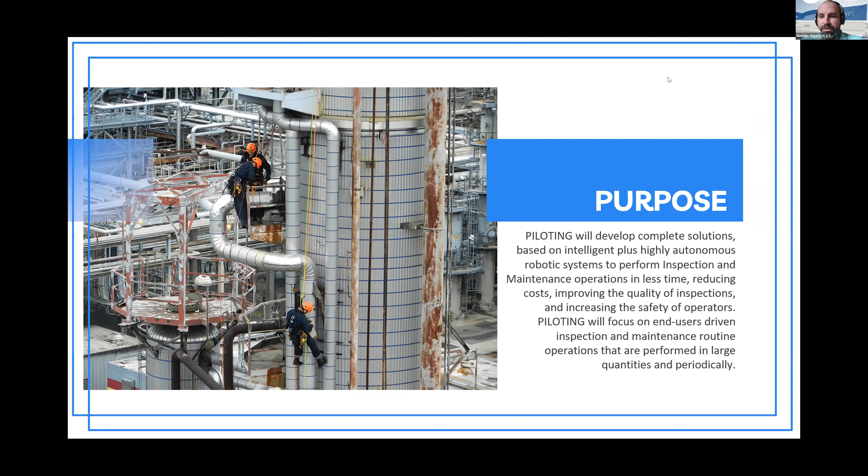So what are the main challenges and objectives? The main three challenges are: of course, as with any inspection, we need to reduce inspection costs and also the downtime - the time we cannot use the infrastructure. This is very important, so you can complete the inspection while minimally disturbing the regular operation of the infrastructure.

The second challenge is to produce reliable and high quality inspection data. And the third is to increase the safety of personnel, because many of these operations take place at height or in other dangerous scenarios and environments.

So in order to cover these challenges, we have five main objectives in the project. First of all, we are working to increase the technology readiness level of the robotics and artificial intelligence technology up to TRL 7 in this project, across different types of robotic solutions - aerial, ground, and crawlers. Also, we are developing what we call the piloting inspection maintenance platform, a set of software that facilitates the use of robots in inspections and also facilitates the handling of all the data required, from planning to analysis of the inspection data, in a fully digitalized way and fully integrated with the robotic system.

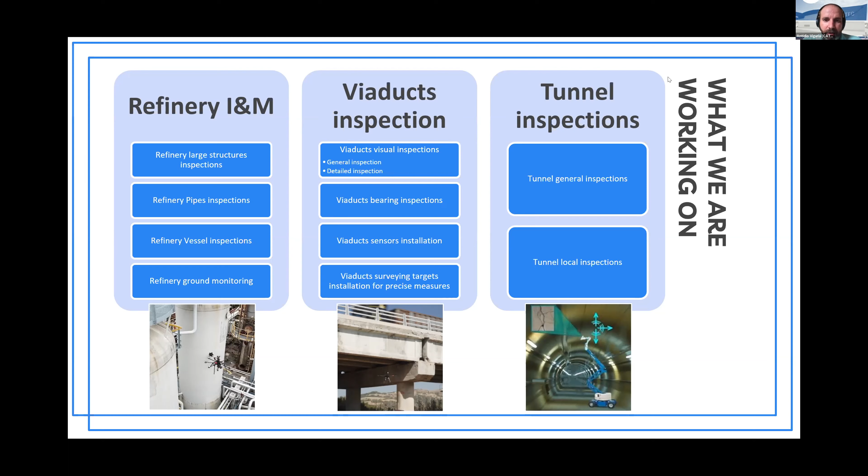And finally, for the tunnel inspection, we have the general inspections that will make use of UGV, and the local inspection that is a mix between the UGV and an aerial robot. So for all these 10 use cases that we are covering in piloting, which is a high diversity, we are going to use and adapt a number of robots.

We have a number of aerial robots, ground robots, crawlers, and hybrid robots that you can see here. It's important to highlight that for all of these robots, we are targeting a high level of autonomy, so it makes it easier to operate and also facilitates their interaction and decreases the training needed for the operator.

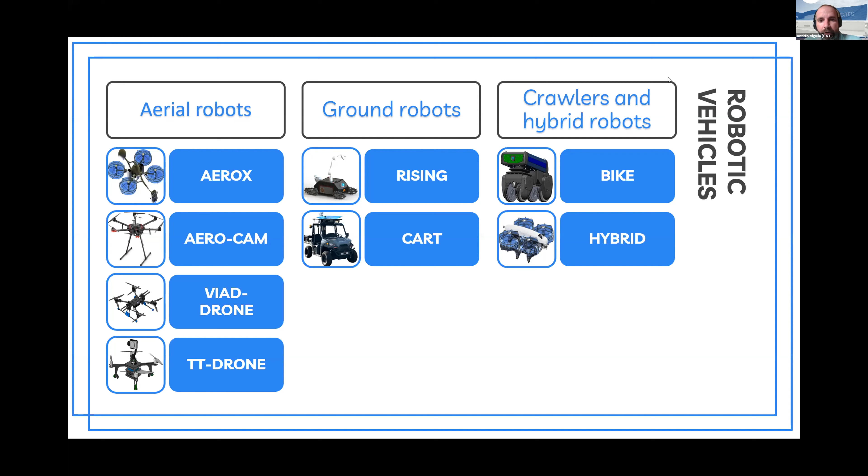And for all these robots, we are integrating what we call the piloting inspection maintenance platform. As I said before, it has a visualization portal, and then it's a set of software that facilitates the planning of the inspection missions, the planning of the specific data, the monitoring of the execution of the mission by the robots, and also the analysis of the data. So it's a set of software that complements the robot and integrates it in a common framework, so you can easily integrate future use cases and future robotic systems.

Since we are covering a large number of use cases and a large number of robots, we hope this will be a key element to boost the use of robotics in inspection and maintenance in the future. Actually, we plan to open source this platform by the end of the project. So if you are interested in that, you can contact us.

And yeah, I think with that I will just leave the floor for the first presentation, and I hope you can take control of the presentation so that you can move forward with the slides. Otherwise, you just have to ask me to do it. Can you see or not the presentation? Can you comment on your value proposition?

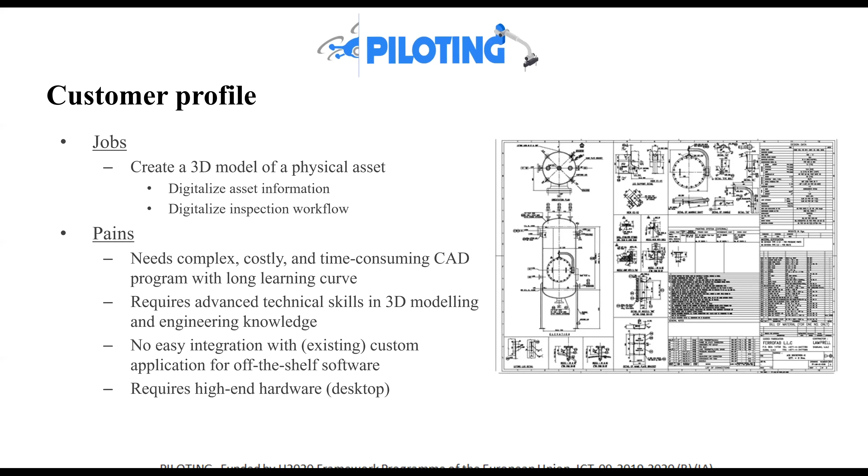Welcome to the presentation of the mission planning interface. Can you just go one slide forward, please? Yes.

Basically, what you see on the right is the kind of information you usually have when planning jobs in refineries and other infrastructure for inspection. It's basically a drawing with some hand-added or computer-added information on where to inspect what, and some basic planning. It's pretty difficult, and of course it varies from asset type to asset type, and it's a lot of work to do this kind of preparation.

And the other thing is, when you later want to follow through with the inspection, it's quite tedious to figure out from the drawings where you really need to do the inspection based on the planning.

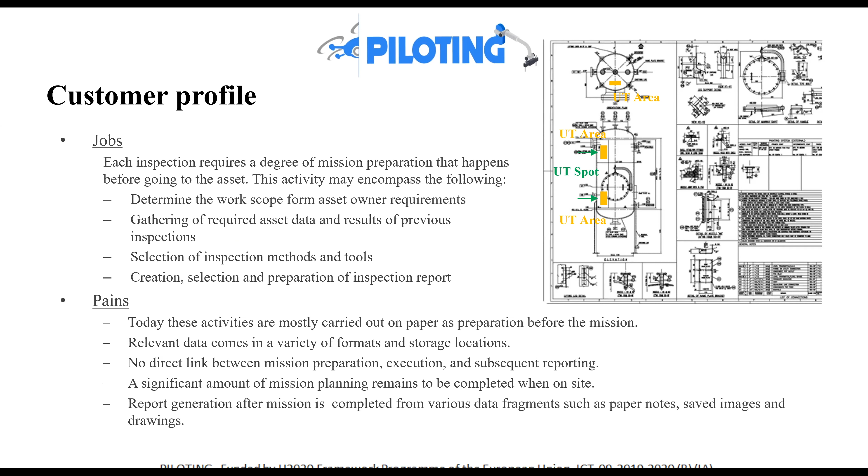So can you go one slide forward, please? Thank you.

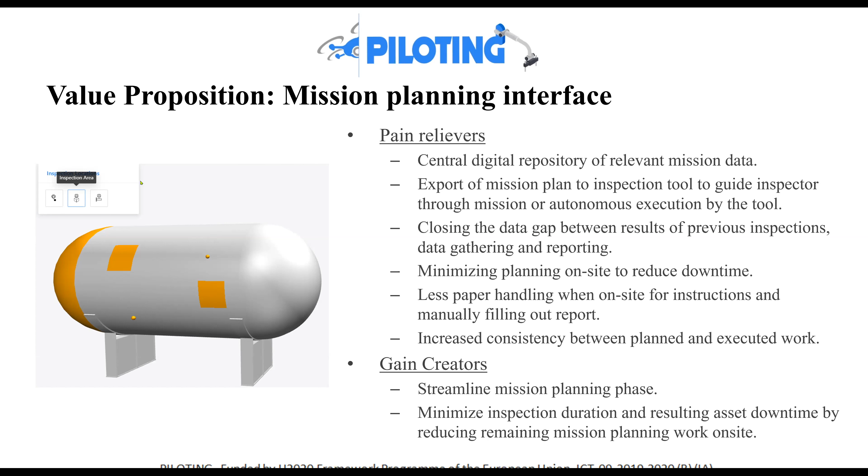Let's say this is a pressure vessel, and on that pressure vessel there are certain areas that need to be inspected in certain ways. For instance, there could be spot locations where a thickness reading should be performed. And of course, it would make sense that every time this asset is inspected, the thickness reading should be taken in the same area. Otherwise comparison over time is very, very difficult.

So you see here on the left how these things can be improved if you have a 3D representation where the location is very precisely stored. Now I will go through the slide a little bit. I already mentioned the central repository that helps access to asset information, as well as to inspection results created in earlier inspections, and also to mission data.

The big benefit of the piloting approach in this is that once an inspection is planned in this type of 3D tool, it can be exported directly to the inspection tool. And the inspection tool can either autonomously already perform parts of these inspections, or it can guide the inspector through the process so that basically the entire mission is executed as planned, guided by the tool or even executed directly by the tool. It depends, of course, on the tool and its capabilities, but many of those tools that are used in the piloting project are able to autonomously move around and follow these inspection plans.

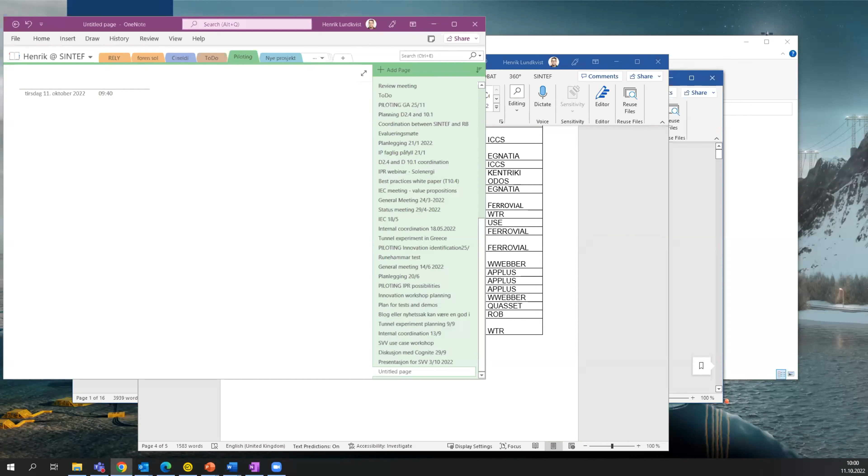Okay, this is the link that is in the chat. And I'm not sure if everyone received the link. Yes. So if you can just share the screen with the link. Do you see the right screen? No, the one with the OneNote, that's the wrong screen. Let me check one second. Okay. Now you get the correct screen? No. Stop share. Okay. I can share the screen. Let's see. Yeah, now we can see it. Not full screen, but we can see it.

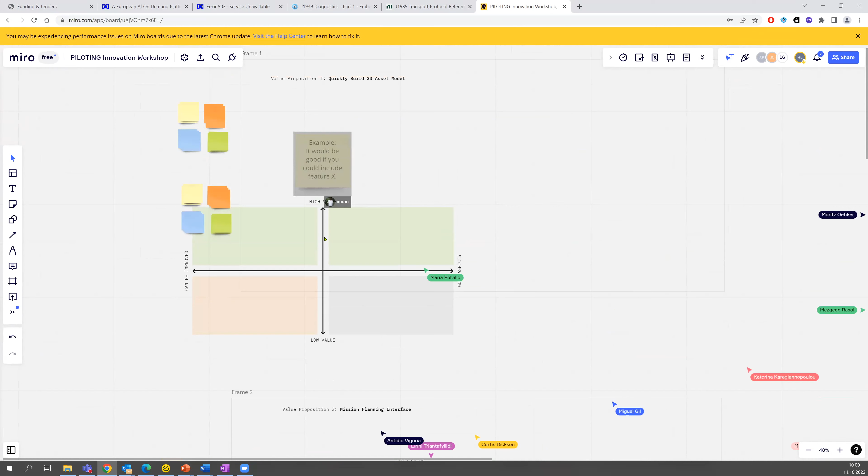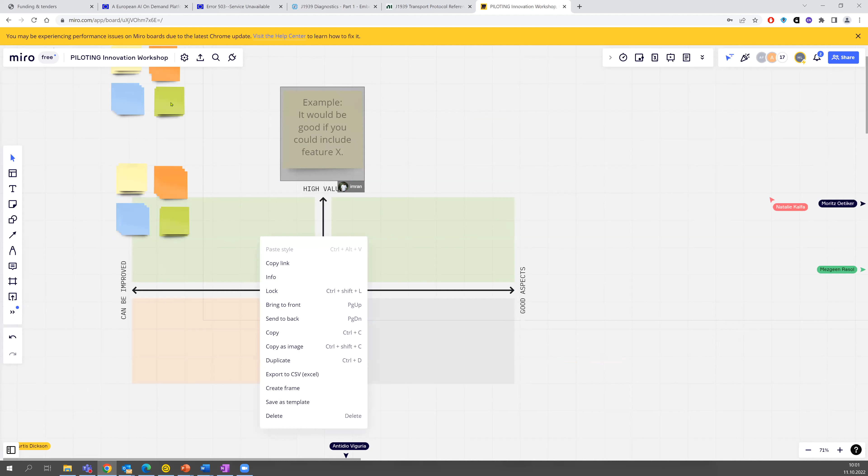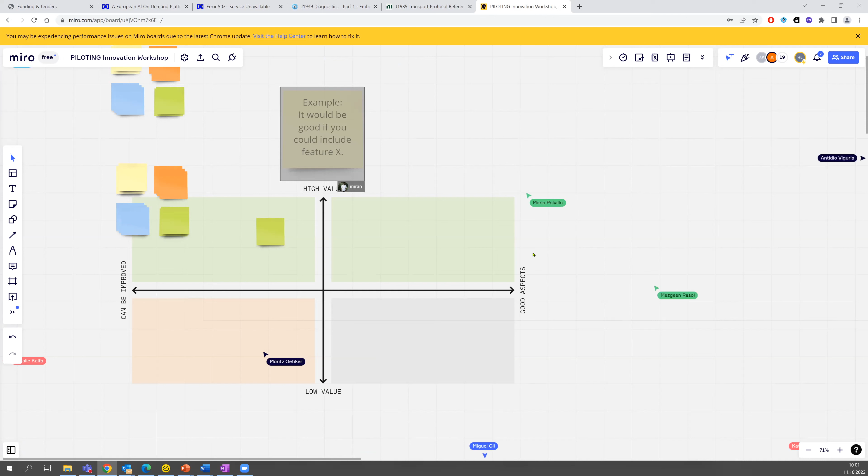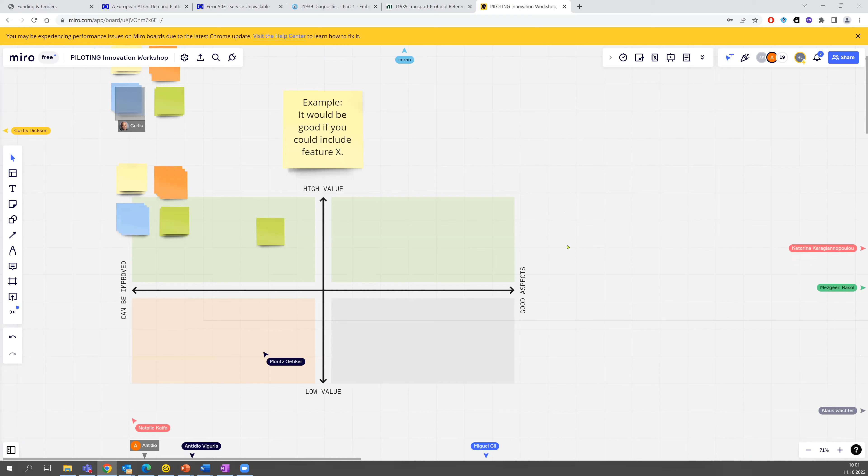Okay, then I can just take it into full screen, and here you can see the different value propositions. It's zooming a bit strange. I think it's struggling a bit with too many users maybe, but the idea is basically that you can either just leave a comment, or you can grab one of these post-its and start typing your comments. And here we use this axis for whether it's something you need to improve or something that you think is good, and on the other axis, if you see it as low value or high value. And if you don't see exactly where to put it, you could also put it just a bit outside of this. That would also be fine.

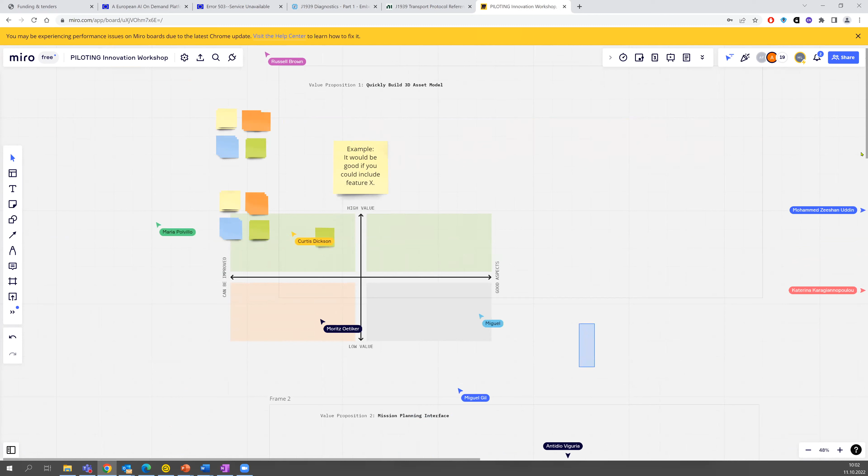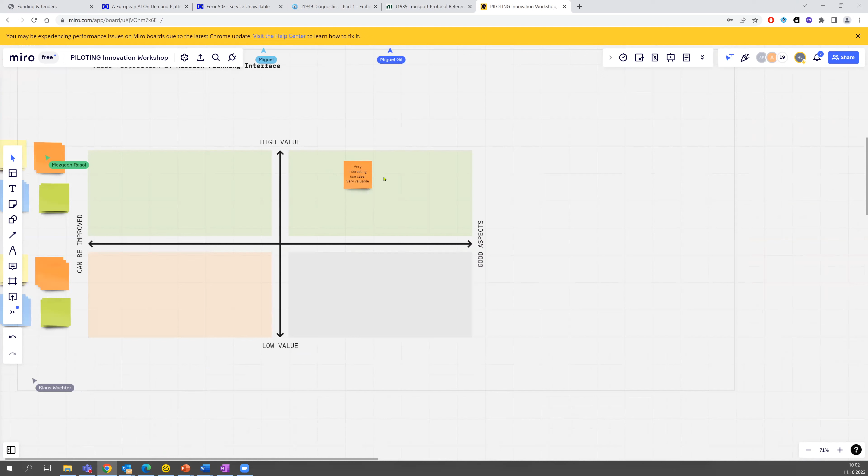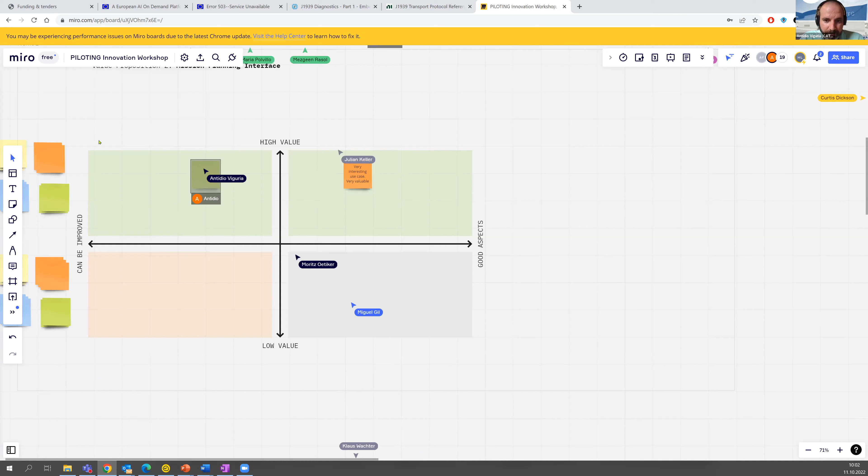But you see we have this frame, so for value proposition 1, the quickly build 3D asset model, I just put this example, and now we should actually be at number 2, which is this mission planning interface that was presented. It's a bit slow, at least for me, but I hope it's working better for you. So here you see someone has put in a comment. It's as easy as that: we can put here a note and then write something like, for example, high value, but can be improved, extend to vehicles such as something like that.

Okay. So please, everybody, have a look at it, so you can put some comments while we are presenting the different value propositions. So I think, Henrik, we can go to the next one.

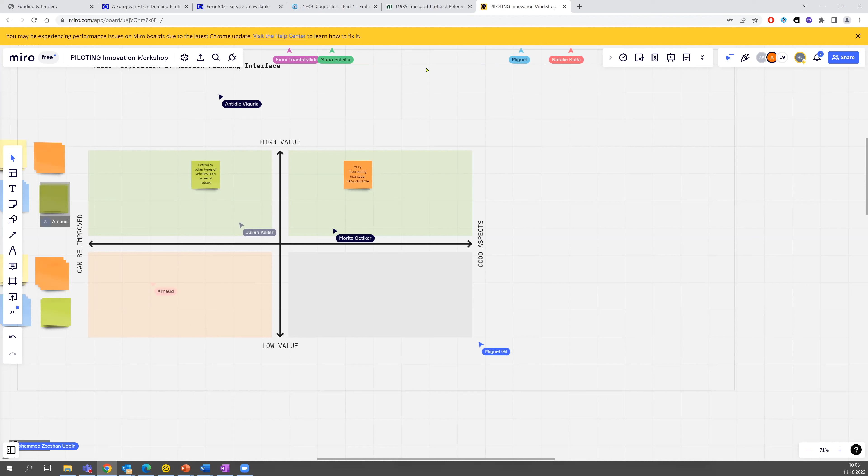Arnaud, is your mic not working? Can you hear me now? Yeah, now we hear you. So I can go back to the first presentation.

Yeah. You can speed it a little bit. Perfect. Yeah, okay, I'll try.

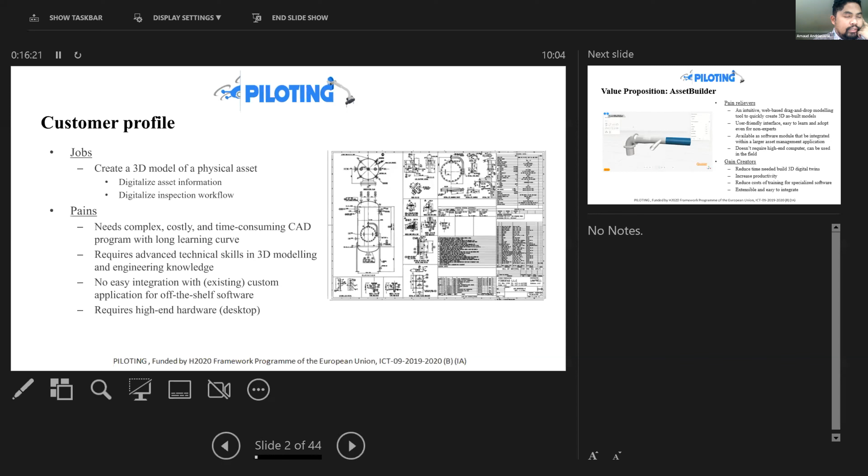Good morning, everyone. My name is Arnaud. I'm from Quasset, and we are doing the intelligence and visualization portal in the context of piloting. This value proposition is about quickly building a 3D asset model, and it's not in full screen anymore, the slides, but so why do we want to do that? So the customer profile that we're targeting here is that the job is to build a 3D model of physical assets. And we see a lot that there is an acceleration of the use of robotic solutions for inspection and maintenance, and also in terms of digitalization of the asset integrity management. And the 3D model is a central piece in that workflow.

And the main problem is that, first, for aging assets, digital twins typically do not exist, and at best you have just the drawing of the as-built assets. So that's what you see on the right there. And if you have such drawings, you need to understand what it is first, but also building it with a traditional CAD program is complex, costly, and time-consuming. And you also need to have a lot of technical skills in terms of 3D modeling and engineering knowledge. And such an application, such as Maya, for example, cannot be easily integrated with existing custom applications, and they also typically require high-end desktop hardware.

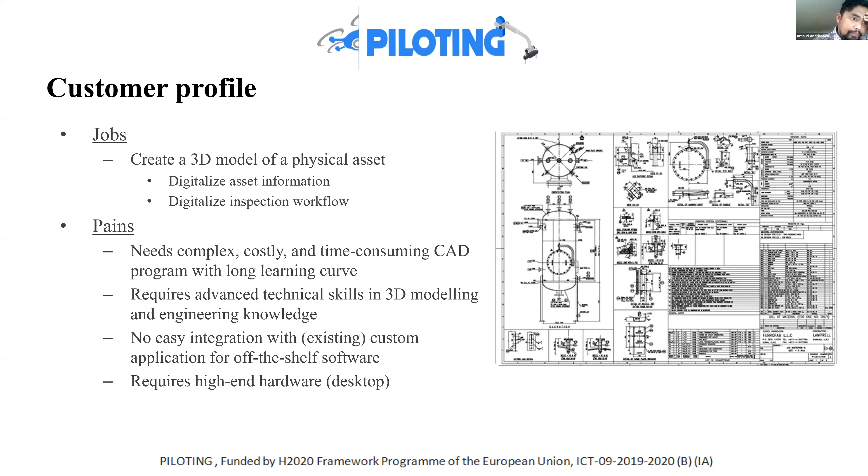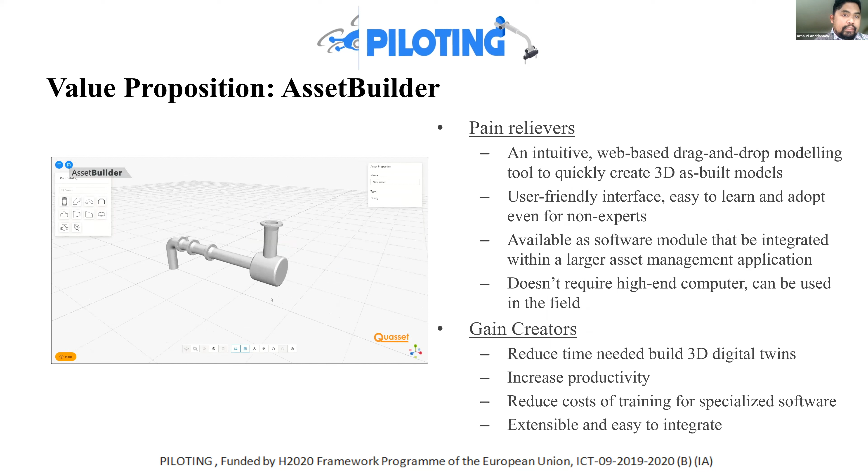So how do we solve that? If you can go to the next slide. Yeah, so what we have here is the product that we already have developed and started to sell. It's called AssetBuilder, and it is essentially a web-based drag and drop modeling tool that allows you to quickly build a certain type of assets. And the way it works is that we put a lot of domain knowledge into the software, so that it makes it very user-friendly and also easy to learn and adopt, even for non-technical experts. And it's essentially just like building an asset from Lego. The Lego here are the parts, and these parts depend on the specific type of assets.

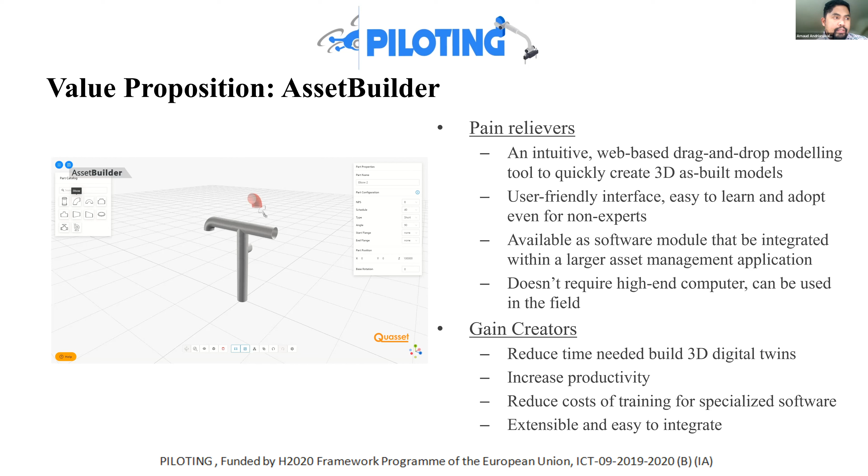And the real gain that you're going to get out of this is that you can build a digital twin of large assets from scratch within minutes. And that results in sensibly increasing the productivity, but also it would reduce the cost of training for specialized software. In addition, we have this product either as a standalone software as a service, or it can also be integrated into existing custom applications. If you go to the next slide. Okay.

As I said, building those models is basically like assembling Legos, and those Legos are parts which are specific to assets. And what we do is that you need to know exactly how those parts connect to each other. And if you change some parameters, basically the whole asset will update. And for that, you need to know exactly what kind of assets we are building. And at the moment, we are supporting 3 classes of assets: pressure vessels, so that's the one that you see in the previous slides from Moritz. We can build piping assets as well, and we can build storage tank assets.

Those models are going to be used to share dimension and geometry of the assets. So that's in the whole line of digitalizing your assets. In the context of piloting, as you saw from the previous slides, we are using those models also to indicate the inspection locations where a robot had to go to. It also serves as a reference for some of the robotic navigations. And we can also use these models to display the inspection results in context of the 3D assets. And yeah, I think that's in short about this value proposition.

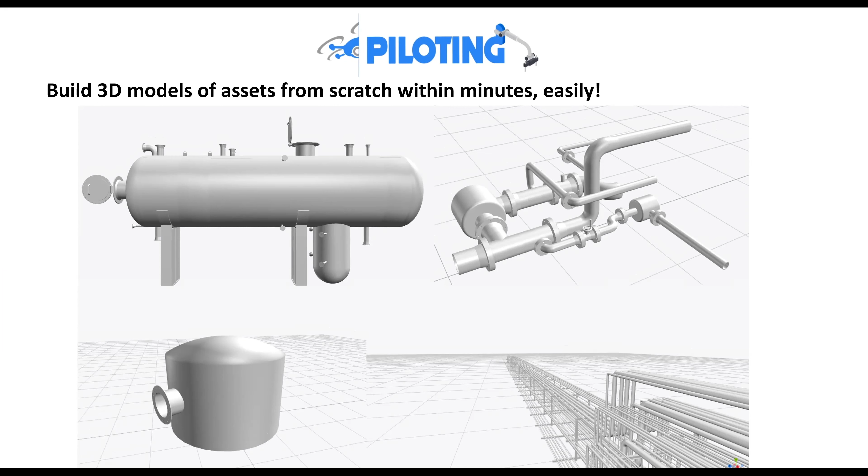Thank you very much. Yeah. I can see that there are some people putting some notes on the Miro. For example, there's one person that put that it could be interesting to integrate with BIM models. Thank you very much. So please, if you see something that can be improved, something that is low value or high value, please use the stickies on the Miro so you can send us your comments, so we transmit your comments in an easy way. Thank you.

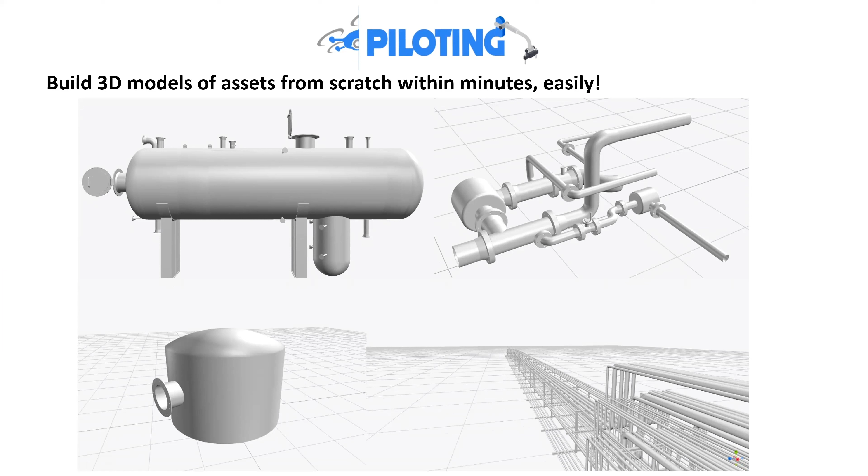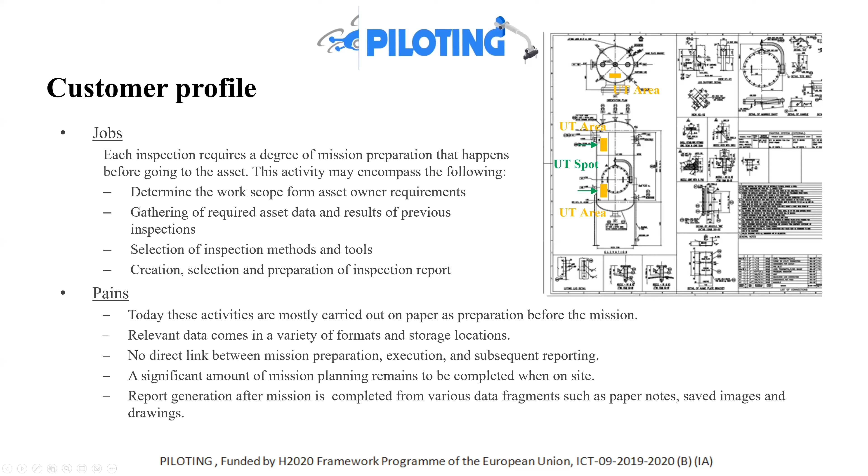So we can go to the next one, Henrik. Yes, so I think it's Christos maybe. Mission planning interface. Oh no, it was already. Yeah, the PILOTING I&M platform.

So hello everyone, I'm Christos, and this value proposition discusses the piloting inspection and maintenance platform. So next slide, please.

The inspection at various infrastructures such as refineries, bridges or tunnels includes mainly three tasks. First of all, the organization of a planning in order to perform an inspection at the respective infrastructure. Second, the collection of different data sources, which may have to be digitalized or even transformed into an appropriate format in order to be stored and evaluated. And finally, the storage of this collected data and the evaluation of them.

During the inspection process, the companies have to collect all the inspection data and also deal with the heterogeneity of them due to different inspections and robotic systems. And also the absence of an automated process means extra effort for collection, harmonization and organization of this data. Therefore, the process of the inspections and the transformation of the data into available digitalized knowledge may be a costly and time-consuming process. And sometimes there may also be inconsistencies in the reports of the inspection results or errors in the results due to inspectors' subjective judgment.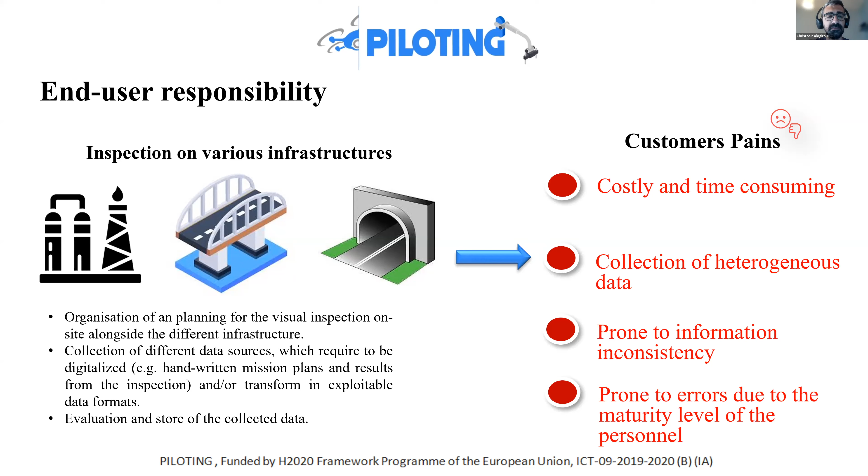So we here introduce the inspection and maintenance platform, which is a framework that can allow the pilot end users, as well as any engineering inspection companies, to perform complete inspection tasks in critical infrastructures. Moreover, this platform offers connection with a variety of robotic systems, and it also offers functions such as data harmonization and storing of this data.

So the platform consists of three components. The first one is the general robot control station. This component is responsible for establishing a connection with every robotic system and also commanding the actions of the robotic systems in order to perform the inspections at various infrastructures.

We have also the data management system, which provides authorized functionality to the users. The main responsibility of the DMS is to manage the data of the inspection. In other words, DMS is capable of retrieving, indexing, and storing any data received from robotics or static legacy systems during the inspection process. So the user can have easy access to this data.

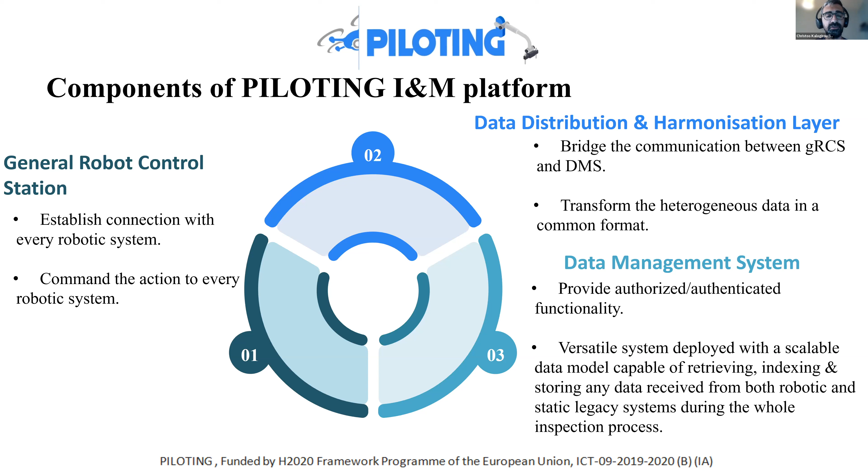So what this solution offers is that now the inspection data can be easily handled as they are digitalized automatically, and they can also be very easily accessed using, for example, the DMS. The inspection missions can be performed in a safe environment, allowing the remote navigation of various sensors, and the inspection data are accompanied by time and location indexing, allowing the localization and detection of any issues for the end user.

And finally, inspection data such as the data from robotic systems, the AI results, or the inspection documents will be given in a standard format, ensuring information coherency and the prevention of any data loss and misinterpretation of the collected data.

So the gain created from this platform is that it provides a solution that can incorporate and communicate with a variety of robotic systems, such as aerial, crawler, or ground robots, to process different kinds of inspections, so that data can be organized and collected for any industry scenarios, such as refineries, viaducts, and tunnels. The platform also offers a better representation of the inspection by monitoring this process and giving an improved, more accurate and safe understanding of the infrastructure.

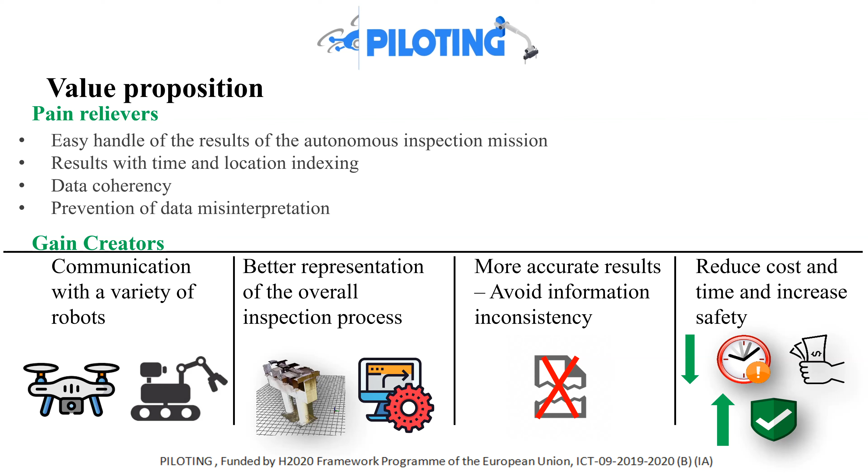Perfect. Yeah. So I think we can continue with the next one while people are putting some comments. We can leave maybe 1 minute. Henrik? Yeah. I think... Bye. Yeah, I will move forward to the next because I think I have it in the wrong order. So. Good.

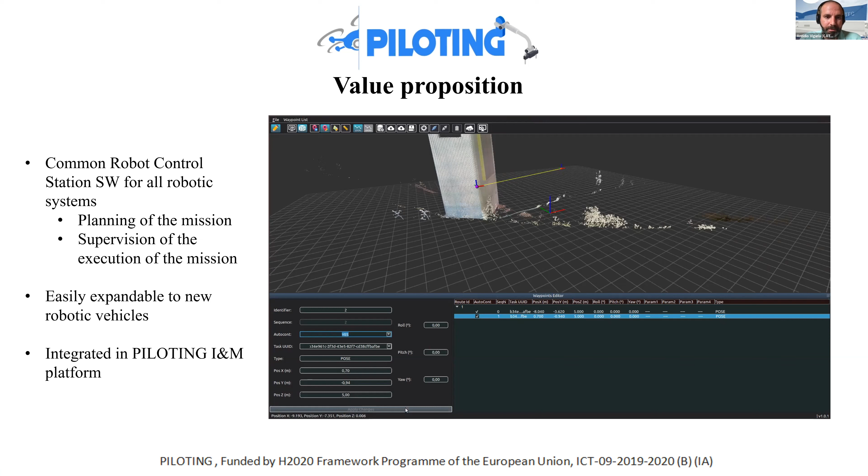Next slide, please. Okay, well here we have another view of the software. You can have a look. So it can be used first — the first video was for planning, and the second is to supervise the execution of the mission.

At least I cannot see the video very well, but right now for me it's stopped. I hope you can have an idea of what the software is about. Good, now it's working. So this was, for example, an inspection — a visual inspection of a pylon using an aerial robot or a drone integrated in this generic robot control station.

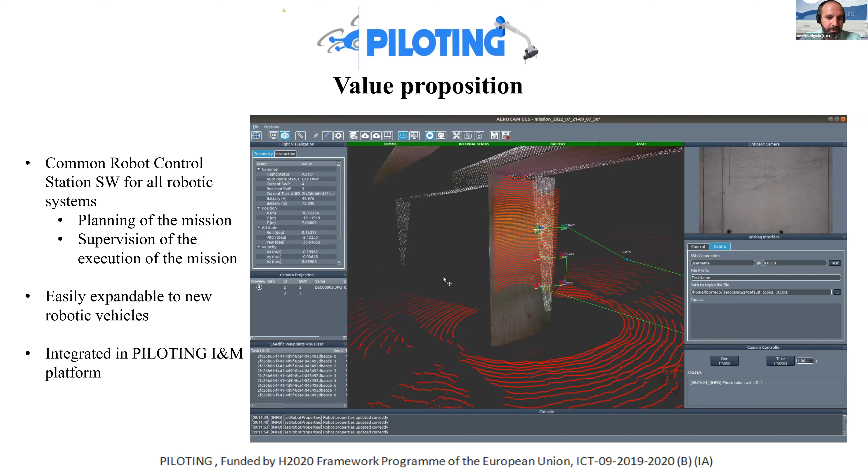Next slide, please. So we have seen first the pains. What is our value proposition? With this unique software you can plan and supervise the execution of a large number of robots.

So what are the values that this adds? First of all, it adds a unified, standardized interface for the complete fleet of robotic vehicles that everybody may have. This is very good because you will have one software for all your robots to supervise and plan the missions. Secondly, of course, it will reduce the training time of the operators, of the pilots, since you're using the same robot control station for all the robots. So it will save you money and facilitate having one person managing one robot, and you can also switch them, because, for example, you need to change the schedule or whatever.

In terms of gain creators, it will, of course, reduce the training costs and training time when a new robot is incorporated, because, for example, the operator will start a new type of inspection and you need a new type of robot.

Also, our robot control station can be installed on a large variety of devices. It could be a tablet, a laptop, etc. And you have a standard interface, so you are not tied to a unique robot manufacturer. So this is very good.

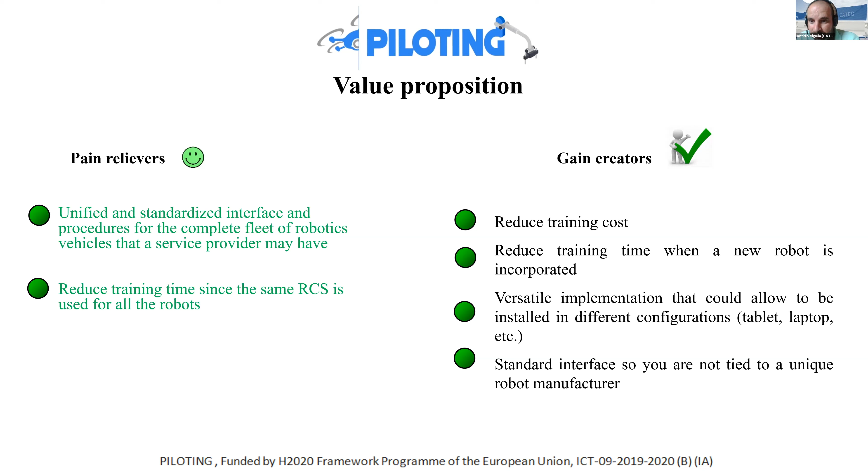For example, there's one related to the good thing: easily integrated new vendors helps test new robots with less effort. Thanks for it. Also, there's another comment saying that incorporating different robots, models, and manufacturers into one user-friendly interface is definitely a huge advantage of the proposal.

Thank you very much. So please, if you think of something that maybe we are missing - any other value, or any other pain that we have not identified, or any gain creator that you think is interesting - please add it. Maybe we can leave a couple of minutes so people can complement and put some other notes if you think of something.

I hope everybody can access Miro. I can see that a lot of people are there. I don't know, Carlos, if you finally got access to it. If not, please share your comments in the chat.

Yeah, let's check if there are more comments. For example, yes, there is one comment on the piloting inspection maintenance platform: if we can integrate with robot operating system - I guess this is ROS.

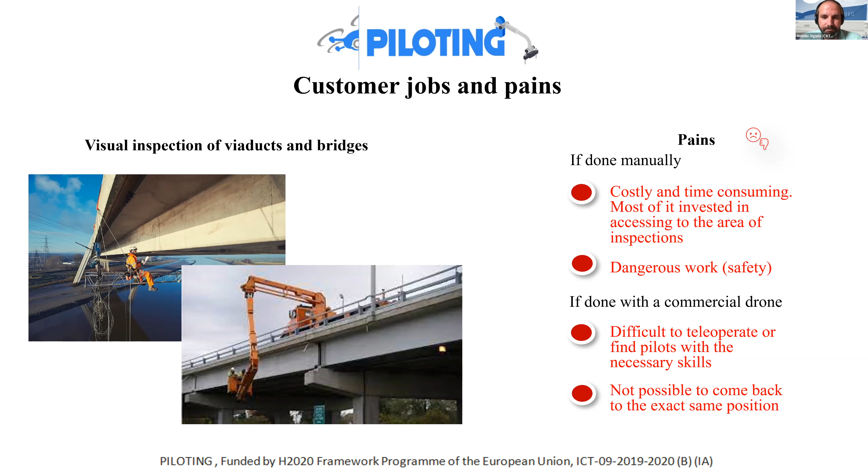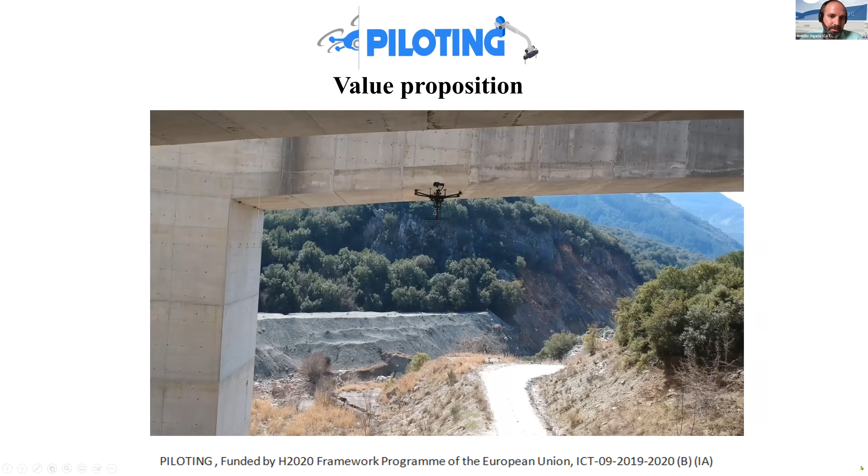So the value proposition you can see here is that we are able, as you can see in the video—it's not going very well with the zoom, but it's okay—you can see the drone and how it can navigate or operate below the bridge without any kind of GNSS, and do it without having to integrate or install any kind of infrastructure. This is very, very important in this sense.

I don't know if the video showed it, but the idea is that you can see it's a very, very high bridge once we move forward in the video. You can see here that in order to access this location to take pictures, you would need rope access or large machinery, and it's very difficult in that sense. So it's high, dangerous and costly work that you can make much easier with a drone.

Okay. Let's see, you can move forward in the video a little bit more. No, okay, it's okay. So, what is the value proposition?

The value proposition, there are two main things. One is the global localization. We have a technology that allows us to localize the drone, the aerial robot, with respect to the bridge or viaduct, always in the same global reference system. So you can come back to the same position anytime you need, even 1 year later, 2 years later, and so on. This is very important in our opinion, and this is a key added value in this value proposition.

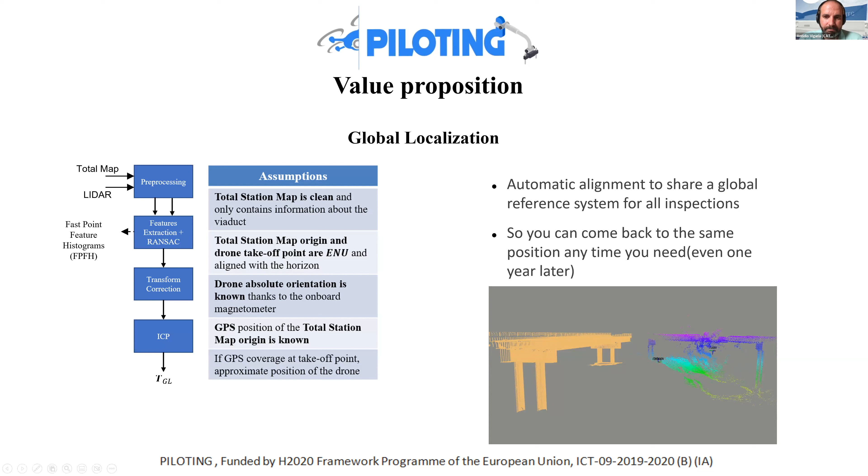So, what are the pain relievers for the operators, for the service providers? This GNSS-free navigation will allow autonomous operation, reducing the training and skill needed by operators. You just need to draw a number of waypoints on the aerial robot control station, and then press run, and the robot will, from takeoff to landing, do it automatically, and every year it can do the same exact trajectory. This is very good because it has a high level of autonomy. It will make the operation faster, but we think even more importantly, it will reduce the skills required of the operator, so the operator doesn't need special skills to take pictures close to the surface of the bridge.

Also, this global localization system allows you to take pictures of the same area anytime you require, so you can come back 2 years later, 3 years later. So at the end, the gains are reducing the time to perform the inspection, reducing the cost, since it's very easy, cheap and fast to access the location without any additional infrastructure or equipment.

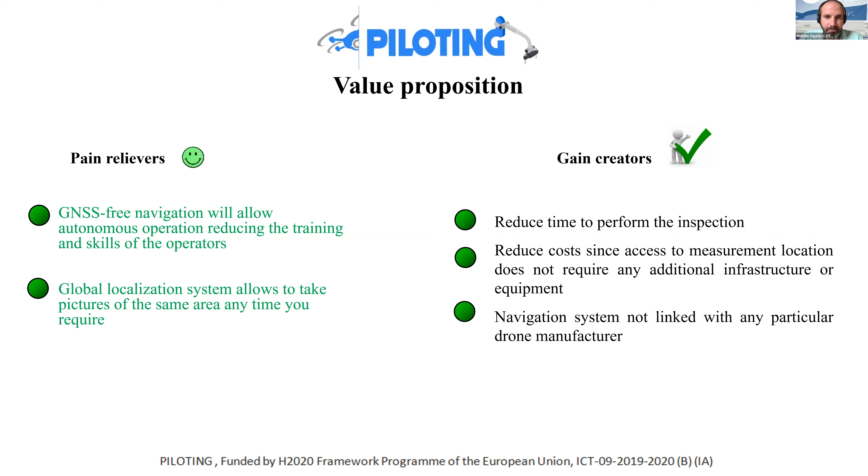I think, Henry, that we have finished with the general ones, no? Yes. So we are very thankful for all the comments you are putting on the Miro board. Maybe we can leave a couple of minutes so people can add some comments to these first five value propositions, once you have seen them.

I remember the quickly build 3D asset model, so you can quickly build a model of the refinery or the asset without difficulty, so you can easily create a 3D model that can be used for planning or for visualizing the inspection results. Okay, you can put some comments here.

The mission planning interface is an interface that facilitates the planning of the specific trajectory, taking into account the robot restrictions and dynamics, and also the different restrictions of the asset, easily. The piloting inspection maintenance platform is this framework, a set of software that facilitates the integration of robots to transform it into a real tool to perform the inspections.

So wall thickness measurement by aerial robots. Next slide, please. So again, what is the customer job? As most of you probably know, in the refineries, an important task regarding inspection is to perform thickness measurements using ultrasonic devices, wall thickness measurements. So they need to continuously monitor the wall thickness of different infrastructure, for example in tanks, pipes, or other infrastructure.

So it's important for them to check regularly the thickness of the different infrastructure. What are the pains related to this work? Well, this is costly and time consuming, especially in large infrastructure. You need to create scaffolding structures or work at height, as you can see in the figures on the left.

As it happened in the bridge or in the viaduct, most of the time is invested in accessing the area of inspection, in order to take the measurement. Maybe you need half an hour just to get to that point, or 2 hours, because you have to create the scaffolding, or 1 day of work to create the scaffolding, and then you go to a different position and take the measurements in only a couple of minutes. And also it's dangerous work, because it's a refinery, it's work at height, so it has a big impact on safety. So what is the value proposition that we are developing in piloting?

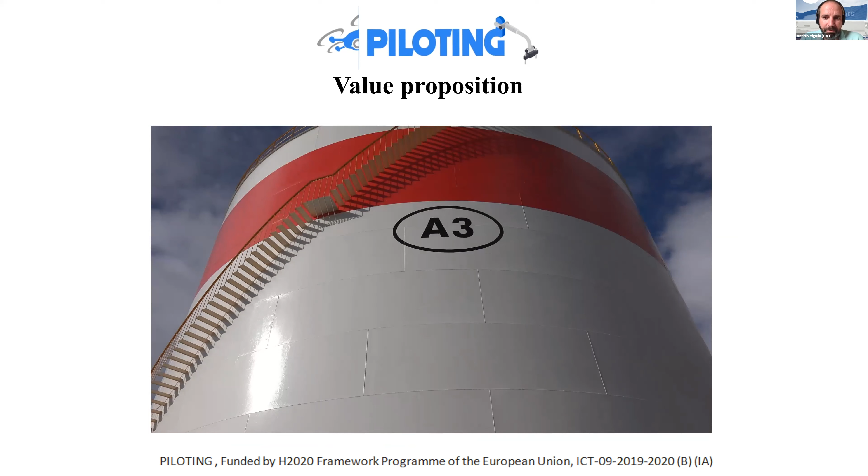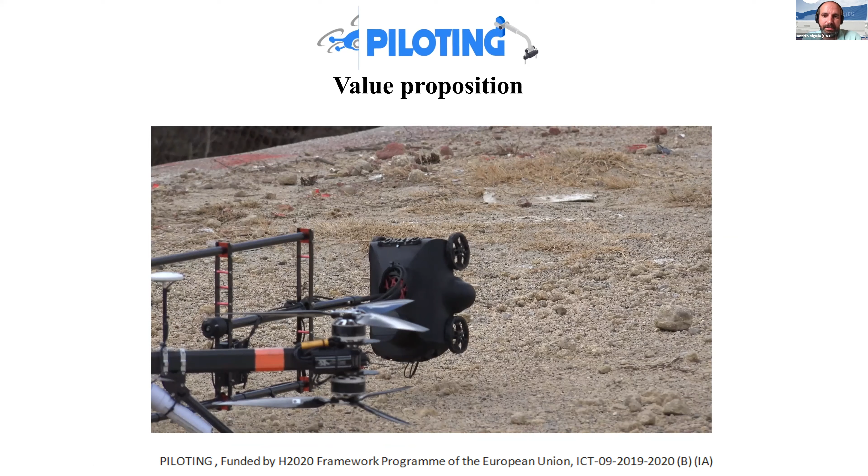Next slide, please. So as you can see in the video, the idea is to use a very special aerial robot that we have developed that is able to perform this contact inspection using UT measurements directly. So you don't need to create or manufacture or put up a scaffolding. You don't need to work at height. So it's much safer and also much faster.

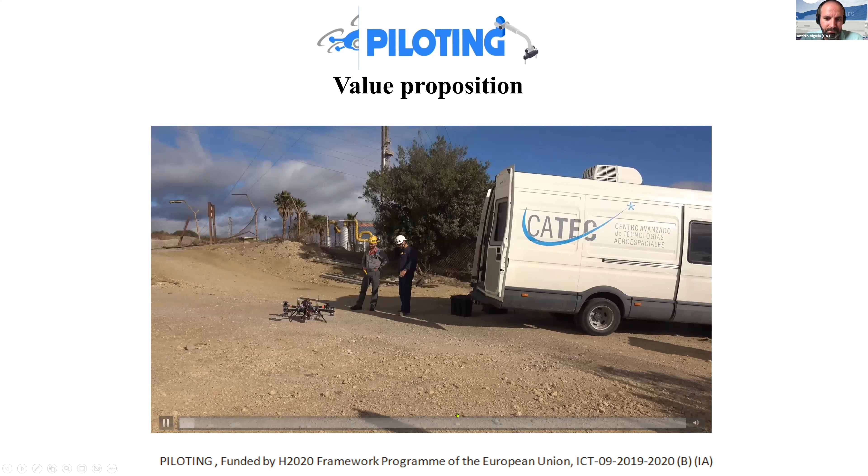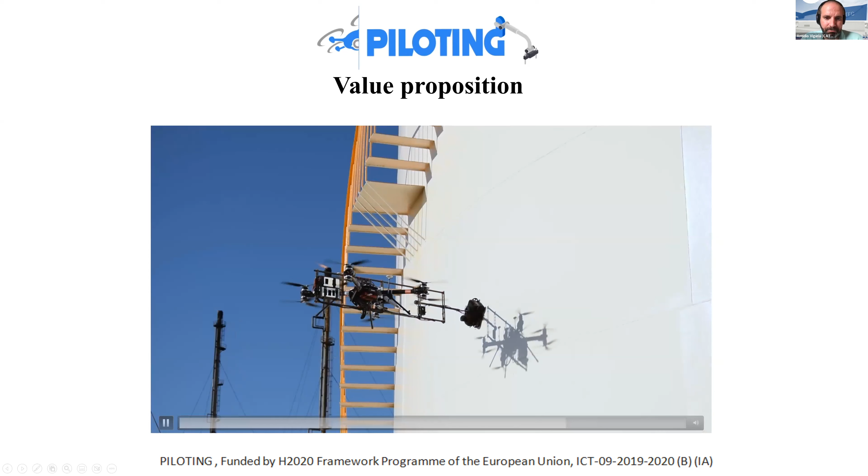So you will see here how this basically works. Maybe you can move forward to the video. So you can see that the aerial robot can make contact and then do the wall thickness inspection on its own without having to have people working at height. Okay, so this is the value proposition.

Just to give you an idea what we are developing. So what are the gains? Next slide, please. Yeah, I will answer the question after the presentation.

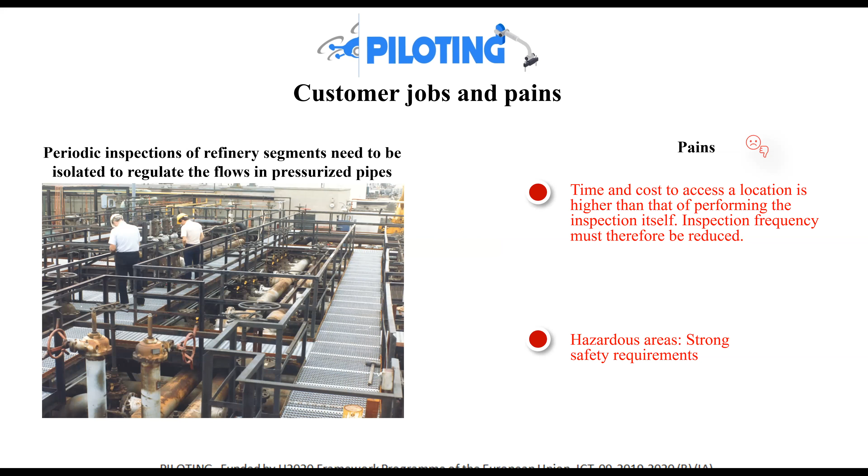Okay, yeah, we're still in the refinery use case. And what often needs to be done is that flows in pressurized pipes need to be regulated. And since this has a high risk of explosion and other dangers, often these areas need to be isolated before you are allowed to regulate the flows on the handwheel valves. So of course, this means that in general, the time and the cost for accessing the location itself is often higher than the cost for the inspection itself.

And this means that the frequency of the inspection is often reduced, which is quite dangerous, given that these inspections are critical oftentimes. And also, in general, as long as there are humans involved in these areas, there are strong safety requirements. So all the protective equipment that is needed and all the approvals that need to be acquired before humans are allowed to enter such a segment often prevent these inspections from being done that easily.

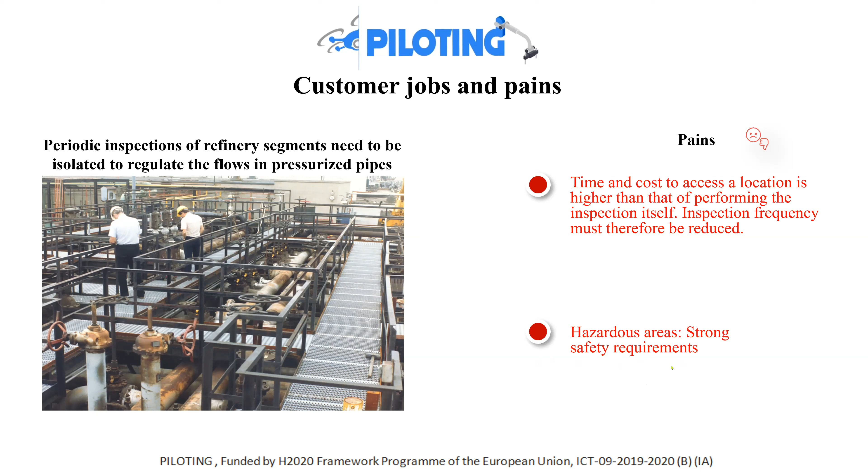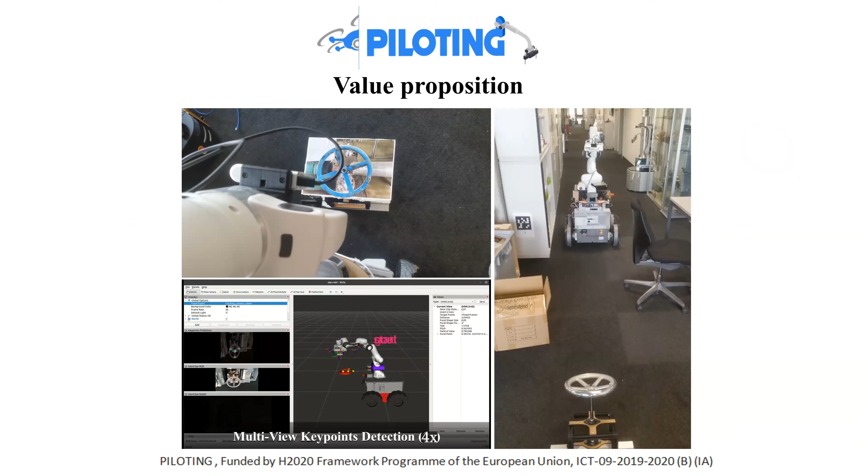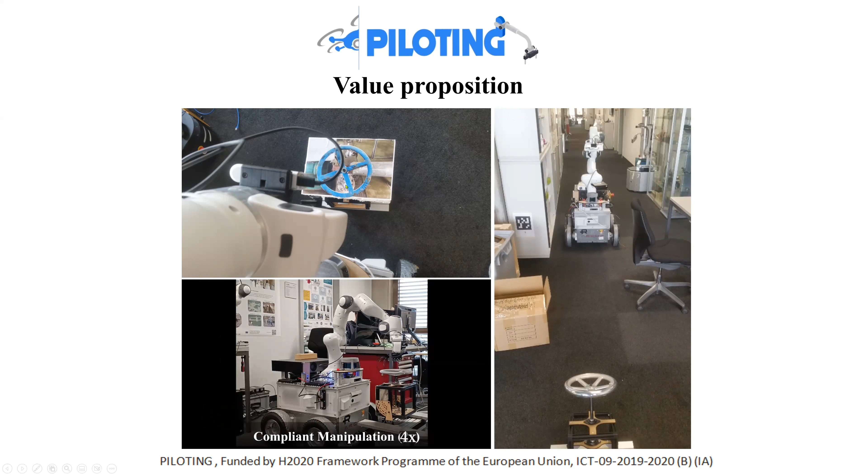So what we propose instead is to use a robot, an unmanned ground vehicle, that can autonomously navigate in the refinery and drive towards a handwheel valve, and then detect this handwheel valve using a key point detector. The advantage of using this key point detector is that it can detect a large variety of different valves with different numbers of spokes with only one training phase. So essentially, you don't have to tell details about the valve type. It can infer different types of valves already with a good prior training.

And then it can manipulate the valve compliantly, as you can see in this video. And the advantage of this is that even if the detection should not be that accurate in the first phase, it will still not damage either the robot itself or the valve. So it's quite a safe operation as well. And yeah, so now when we look at the pain relievers, we can see that exactly the risk for the human personnel is reduced by using the robot. And this also means automatically that more frequent inspections can be conducted without additional costs.

Looking at the gain creators, we now don't have to consider additional operator safety measures. So only the robot needs to be safe, and then no additional measures need to be considered every time. Also, on top of that, since we are using a torque controlled robot, we can gather quite a lot of inspection data while doing this. So for example, the handwheel reaction torques are measured while the robot performs the task. So this allows, for example, to detect when a valve gets corroded or is stuck. Then this can be seen quite easily in the curves that come out of the measurements.

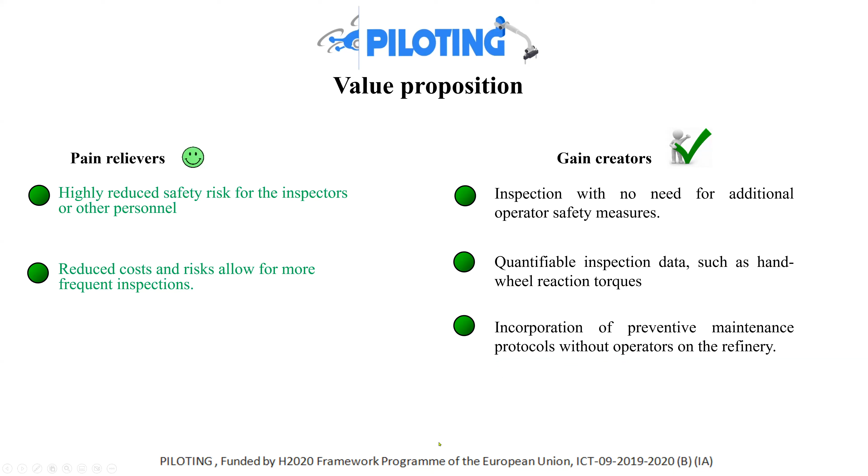So this allows already to do preventative maintenance in a sense. And also these protocols can all be conducted without having to have the operators on the refinery itself. So yeah, that's for the valve turning use case.

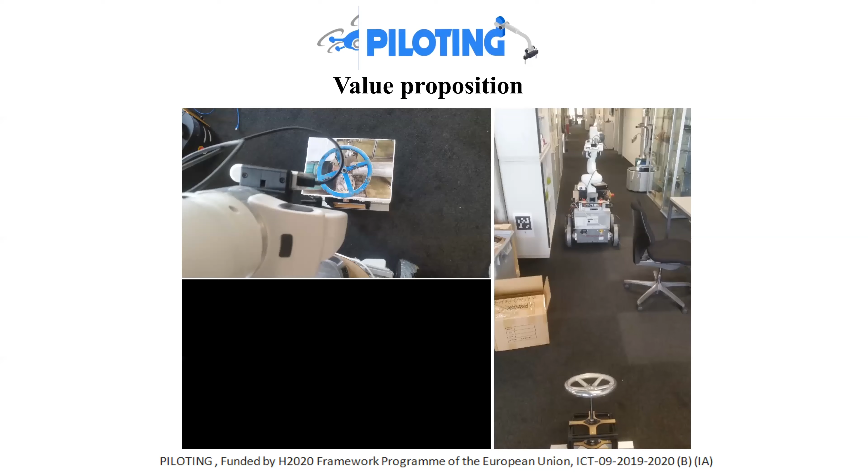For example, this one regarding accessing pipe areas: it used to be difficult, a wheel-based robot might never reach these areas. That's true. This is something that we are working on in the project. We are working on two ground robots, and one has more mobility. But it's true that it's something to take into account. Thank you.

Also here it's said that torque data over a long time will improve the maintenance work a lot. So that's also, thank you very much. That's a very interesting comment. And the torque information is good, as valve handles generally get seized and require a lot of torque initially to break the initial movement. Okay. Thank you very much for the comments.

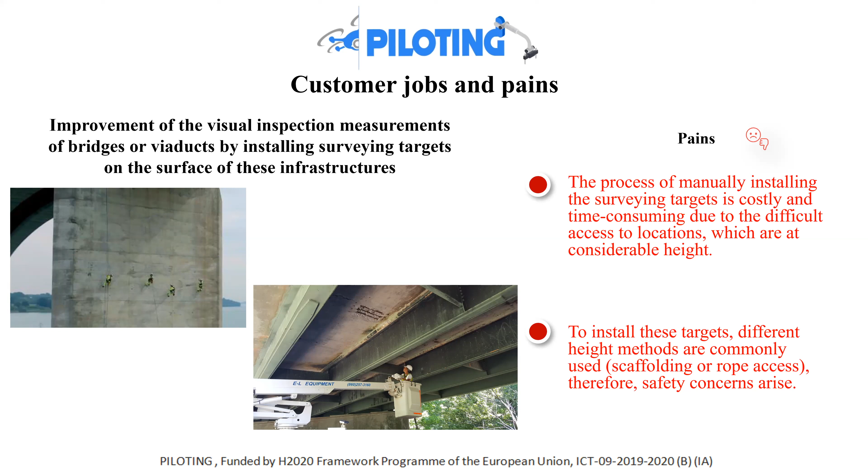And the UAV will navigate to an approach point in front of the first selected spot, and then the robot will start the approaching maneuver. It makes contact and attaches to the pillar. It will then install the surveying target, applying enough force to stick it on the surface, and next it will detach from the pillar and return to the approach point. And then if the operator wants, it is ready to continue the mission, installing more surveying targets. Next slide, please.

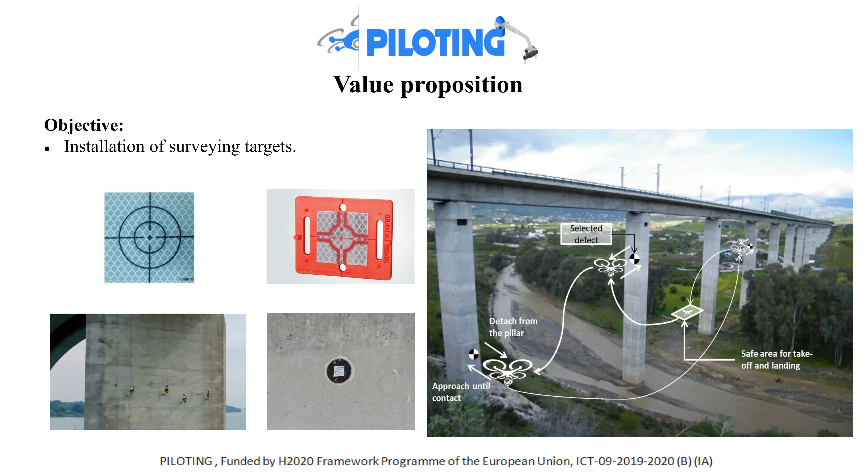Here you can see the aerial robot we have developed from scratch. I would like to highlight that with only one robot, we can perform not only surveying, we are able also to do the visual inspection, and we are able also to install some wireless sensors, because one of the requirements of the project is we should design a platform that can fulfill 3 different use cases in a viaduct. So here in particular, we are showing you the contact end effector that we use to install the target, and the target is placed with a touch and go maneuver against the wall. Next slide, please.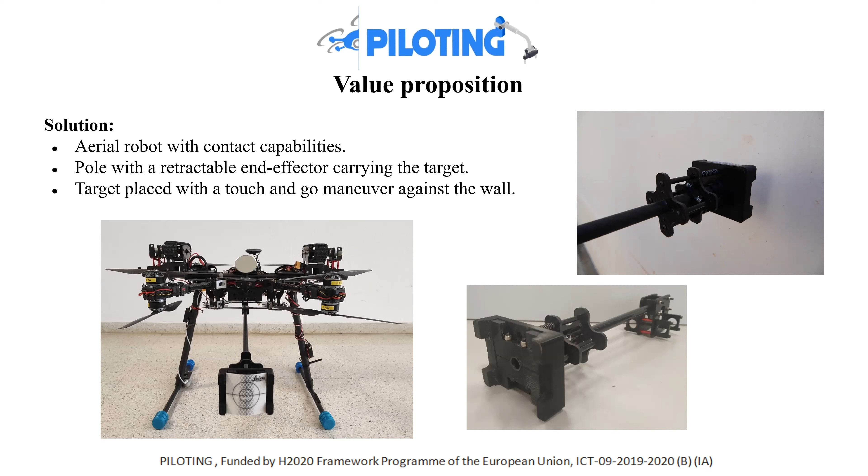Here you can see some pictures of the installation of targets with the aerial robot. It's a real mission that was conducted in a real viaduct here in Spain. You can see how the robot navigates, develops the approach to the pillar, and makes the contact for precisely installing the target. The drone navigates to the point of interest previously selected by an operator, and this point could be at different heights. And we have demonstrated that we are able to install surveying targets in only one mission, taking a total time of about 15 minutes for the installation of 3 targets, and addressing real industry tasks related with the inspections.

And also I would like to highlight that we are obtaining some information and background from some end users of the project. They are experts in performing maintenance and inspection tasks in viaducts. In order to compare the measurements we are obtaining with respect to the traditional methods, they are giving us some reference about the methods that are used now.

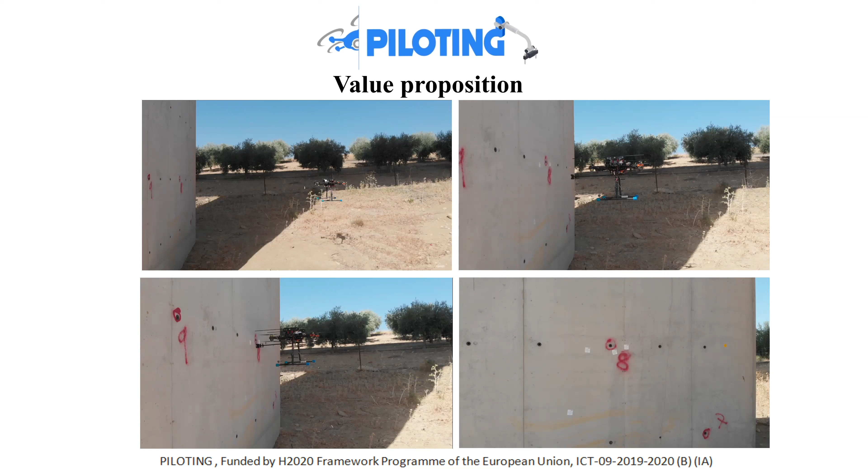Next slide, please. So, as the main pain relievers, the time required to install the targets is drastically reduced. As I have mentioned, we are able to install targets in about 15 minutes, and we are able to reduce the accidents of the operators due to the tasks that are performed at different heights.

And as gain creators, we reduce the time to install surveying targets, as I have said. We reduce the cost derived from the difficulty of access to the target installation location for the operators. We also increase the precision of the location in which the surveying targets are installed due to the localization system of the robot. And also, very important, the safety of the full procedure is widely increased.

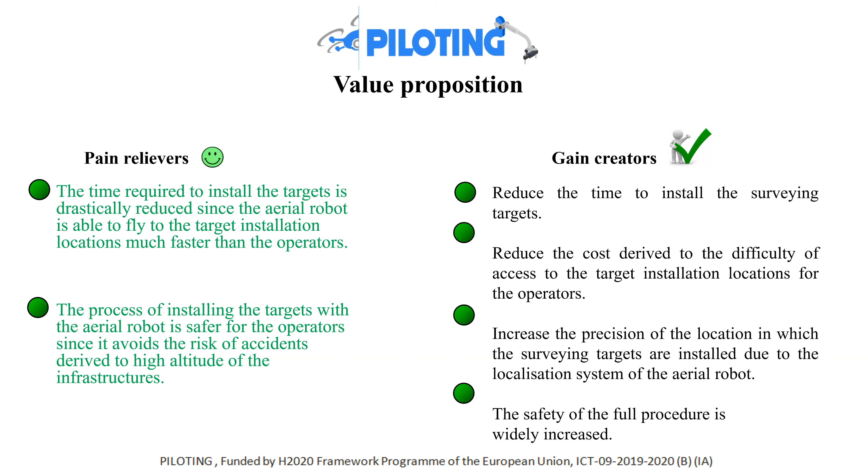Let's give the people a few minutes. We are in frame 8, so it's the second column, okay? And so please, if you have any comments, anything that you can add, please put a note in the Miro board, so that it could be very good. And we will leave a couple of minutes so people can do it.

Again, if anybody would like to comment on any other value proposition, please do it. For example, I can see on the one of the autonomous hand wheel valve detection manipulation: is that only visual, only audio data? Screeching valves, for example, that's interesting. Accessing confined areas can be difficult. This is already commented. Okay, so please remember that you can add to any other. For example, there is a comment now on the installation of survey targets.

Natalie, let's wait so she can finish. Okay. Make surveying of bridge deformation much easier to execute, both in terms of time, but also in terms of planning and safety. That's good. So I think you like it. Thank you very much.

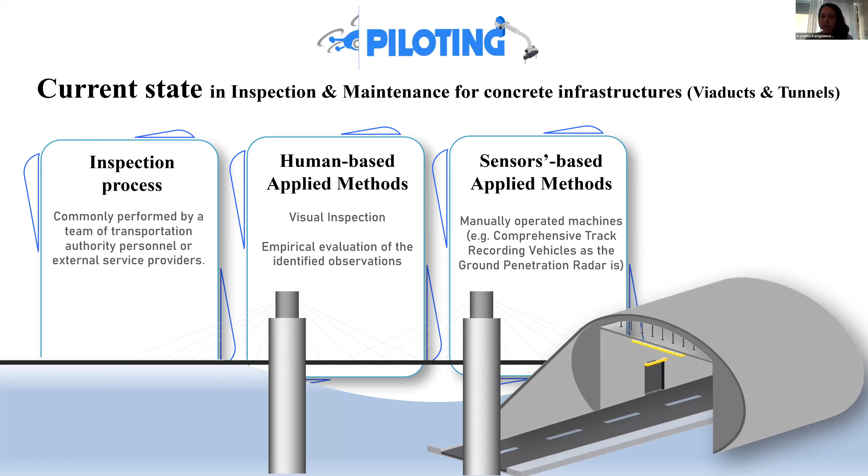Referring to the aforementioned activities, the main customer pains and challenges are that, because it's a manually performed process, it is usually a resource-consuming operation. It is sometimes tedious, and it is often completed by two or more teams of personnel. Also, we found across the literature that there is an absence of a holistic inspection procedure or training procedure to apply common steps to perform this inspection process, or regarding the data collection for defect detection.

We have also identified that the classification or detection of the defects is prone to the inspector's subjective judgment and maturity level. Also, during the inspection, they normally close some transportation lines, so the personnel potentially experience safety issues because they're in the middle of roads. They also find it difficult to perform the inspection in remote and difficult-to-access areas.

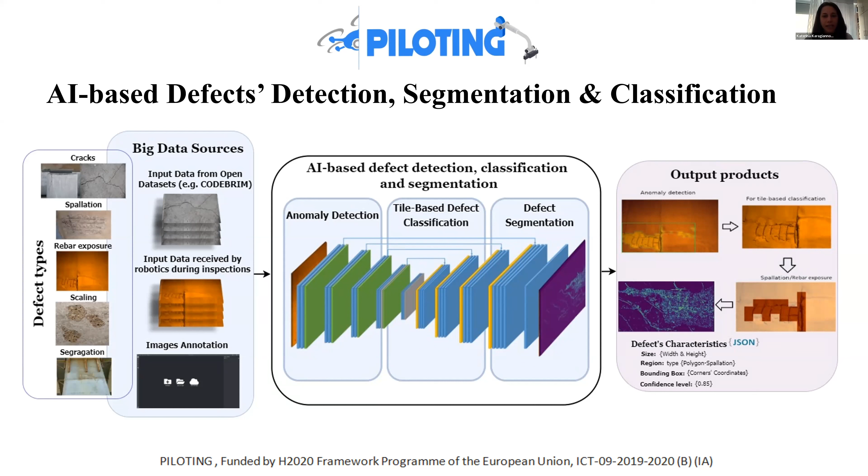I think we have some delay. Enrique? Okay, thank you so much. So what is our...

What are the pain relievers of our solution, or in general the benefits? For sure, we can substantially reduce the effort that normally is required by personnel to either collect or validate the health state during the inspection of infrastructure. Of course, we can reduce the time and cost for inspection and the presence of inspectors in damaged regions.

We believe that the involvement of personnel will be complementary, in terms of validation of the quality of results after implementation, but performed remotely rather than on site.

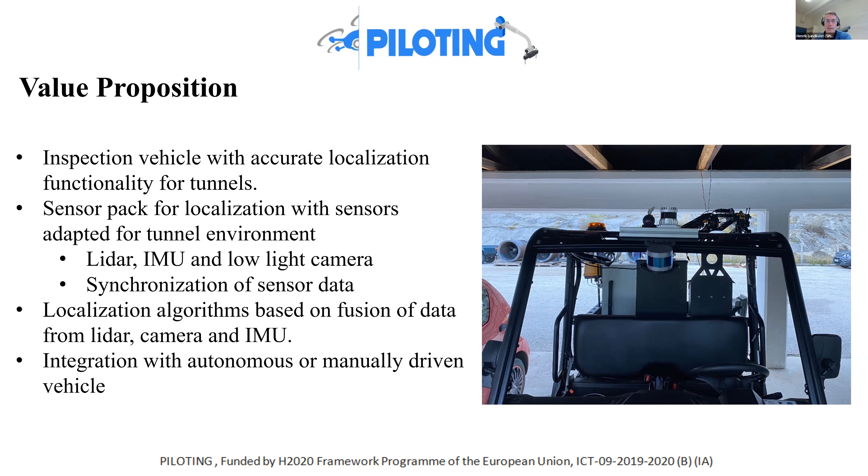So the pain relievers are basically that you do the positioning without the need for any external systems, which will reduce the cost and the effort of doing the positioning. And you also have this gain of having a much improved accuracy in the positioning, and you have everything on board in the vehicle once it is integrated.

Yeah, so that's the short presentation of the navigation in tunnels. So I can leave you the time to go and comment in the last frame in the Miro board. And thank you for the attention.

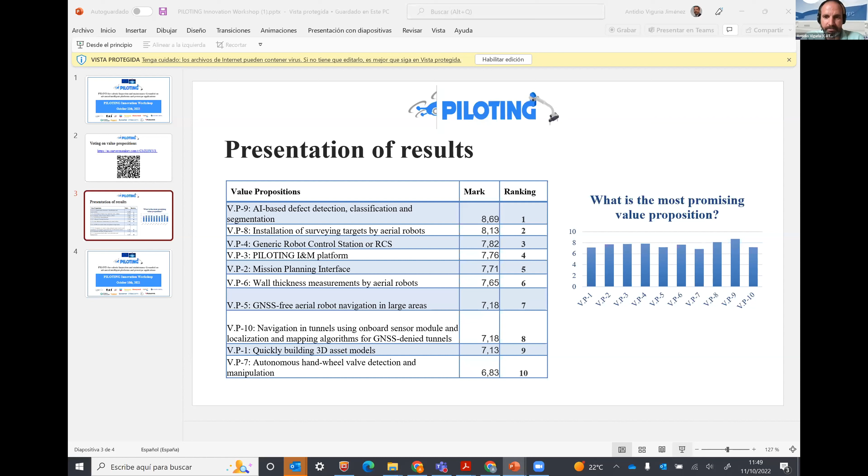Okay, let's just conclude the workshop, and sorry for this delay. So you can see here the voting results. After recollecting all the votes, we have the different value propositions ranked.

The AI-based defect detection, classification, and segmentation ranked first. Installation survey targets, second. The generic robot control station, third. The piloting inspection maintenance platform, fourth. The mission planning interface, fifth. And the wall thickness measurement level, sixth. Then we have GNSS-free robot navigation in large areas, navigation in tunnels using onboard modules, quickly building 3D asset models, and autonomous handwheel detection and manipulation.

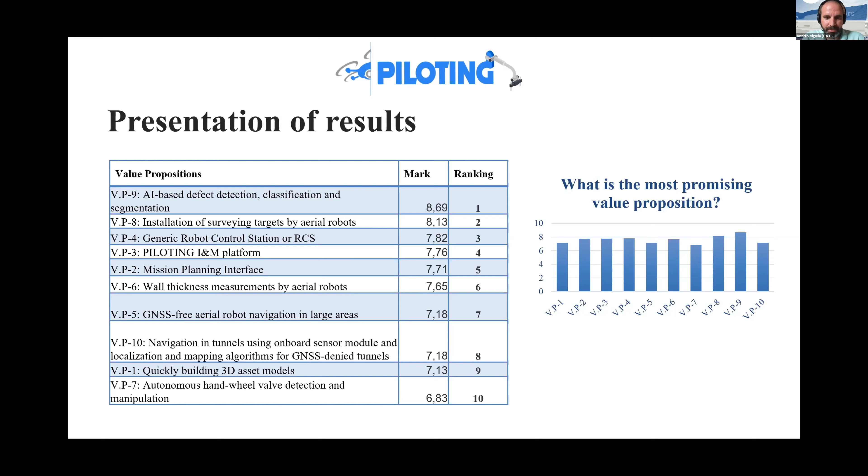So thank you, that was the ranking. Thank you very much for participating in this piloting innovation workshop.